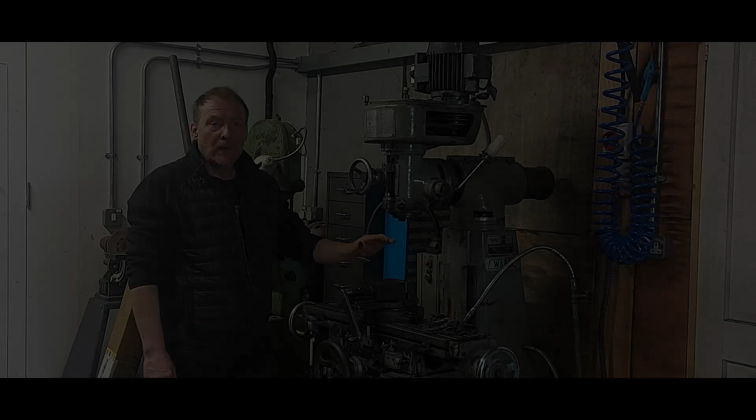Well, we've got the mill back together, so that's good. Got the head back on it. We've made our drawings, and hopefully, if everything goes according to plan, it should fit. So, on with the manufacturing. Right, well here we go with the drawings. You'll have to forgive the crudeness of them, but I'm sure you'll get the idea. So we've got a top plate. That's what we're going to make. It's a top plate and a bottom plate.

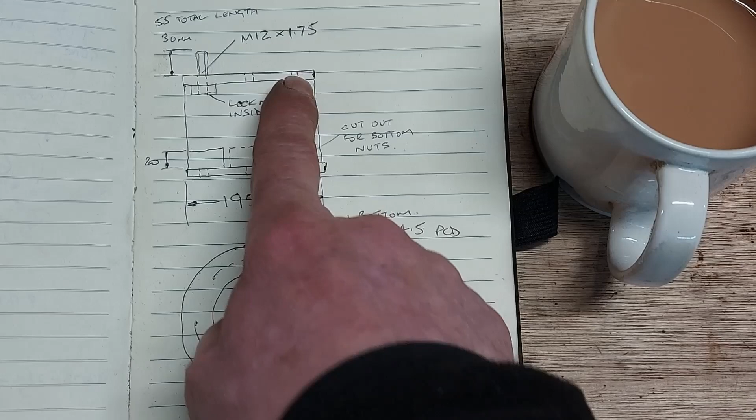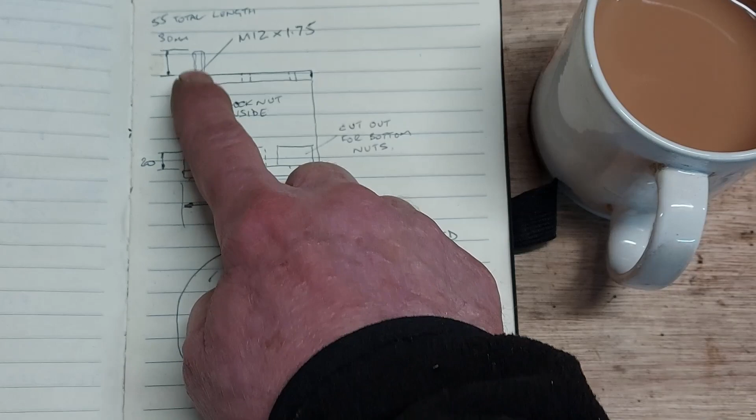The top plate will need to have a 115mm hole bored into it. That allows the current head to sit down into that, which it would do on the body of the machine. The bottom plate will have to have a register on the bottom to sit in the hole that's in the base at the moment, again at 115. And then we shall drill and tap 3 holes, M12 by 1.75, and insert some studs with a lock nut on the back, which we can access through the top hole.

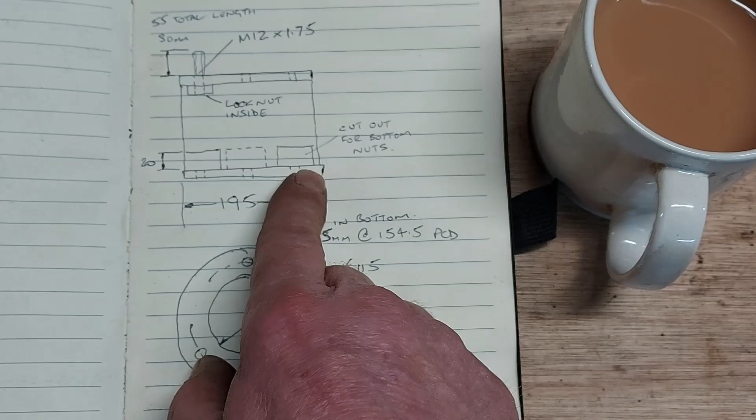That will allow us to bolt the head on, and then we shall recreate the scallop details in the base, which is in the casting already. That allows us then to get to the base bolt, so we can spin the head left and right.

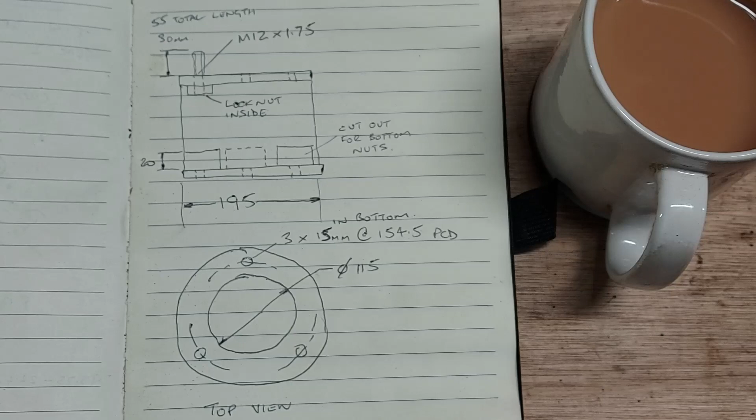I was originally going to go for a 3-inch riser, but looking at it now, I think we're going to have to go for something a little bit bigger, because if I'm going to make something, I don't think 3 inches is going to be big enough, to be fair. So we're going to go for probably twice that, maybe 6, I suppose, with the 20mm plates. That's going to take it to just over 7 inches. I think we'll still be all right for table travel. If not, we've always got the quill to rely on, and we'll see how we go from there.

Not quite sure what I'm going to do first. I think I'll probably make up the plates, top and bottom, which we shall probably set up on the rotary table on the mill, centre the rotary table, then centre the plate, and then we can run a cut around it on the rotary table. That'll probably be quicker than trying to mess about on the lathe. We can also bore the hole.

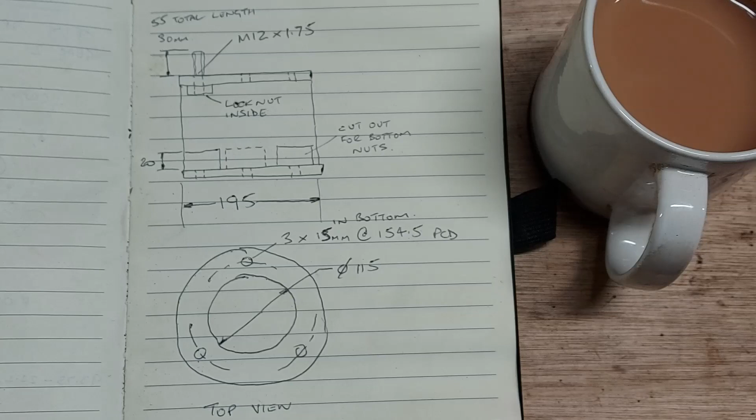Probably not to finish dimension. Concentricity might be a bit of a problem because it's going to be a welded part. So I'm probably going to take everything somewhere near dimension, and then once it's all finished, we can set it up on the lathe and face it, turn it, bore it, and do what we've got to do. Food for thought.

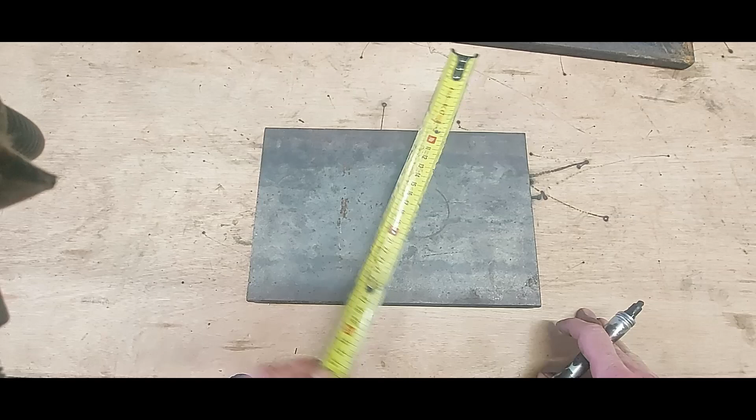Okay, here's one of our plates anyway. It's currently a little bit too big, but it's almost size. We want 195 diameter, so we're almost there. So we'll add a little bit of layout lines. Notice the obligatory tea ring. So let's go around about the 100 mark and in the centre, and that will allow us to add some layout lines so we can see what we're doing.

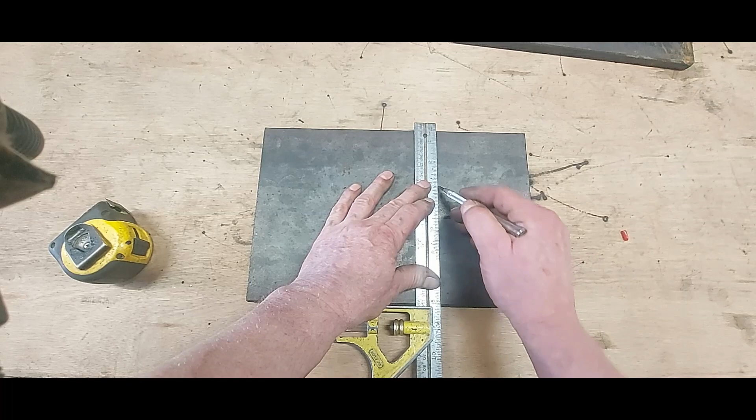So we'll give ourselves a little bit of room. We're coming just over 100. That should be more than enough. And then we want to find the centre, and we are at 200 at the moment. So if we go to the 100, which is there, and now we can dot punch that and get it set up on the rotary table and find the centre. Off to the mill we go.

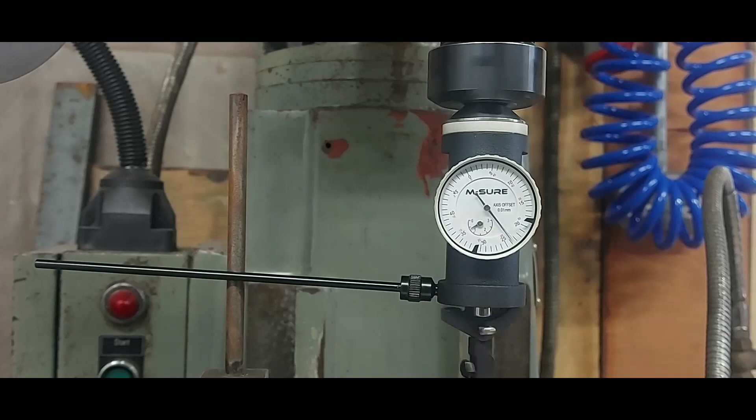Right, so there we are. We've found the centre of the rotary table with the coaxial gauge, which just makes life so much easier. So we're within 0.01 of the centre. That's pretty close for what we want, considering this is going to be a welded part. I think that's definitely close enough.

Right, we've got our plate mounted to the rotary table now. We've got it mounted on some parallels so that we don't obviously hit the rotary table. And we've got some clamps on there. So hopefully we take some very light cuts, take our time with it, and hopefully we'll get there.

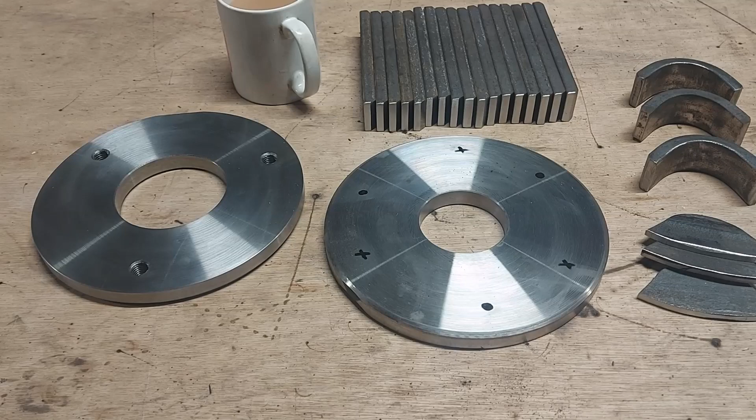Right, well, after quite some machining, as you can see, we've got most of our components ready to go now. We've got the base plate here, obviously the top plate there, and then our various components. These nicely bent pieces will form the scallop around the base nuts, so that will fit on there, get welded on with a little top hat to go on it, and that will sit there. And that will give us hopefully enough room to get the spanner in to be able to slacken and tighten the nuts on the base in order to swivel the head.

And then we're going to use these in vertical fashion all the way round in between to give us the height. And then we'll have to cut some down, hopefully 3, to get in the top of there and weld it all together.

First off, we're going to weld these on because they're not that critical. So I think we're going to weld these on, and then after that we shall tack on probably 3 of the uprights, and then we'll set the whole thing up in the lathe with some form of bung to locate the tailstock into there, hopefully to keep the concentricity, and then we'll work on getting it tacked together and then see where we go from there.

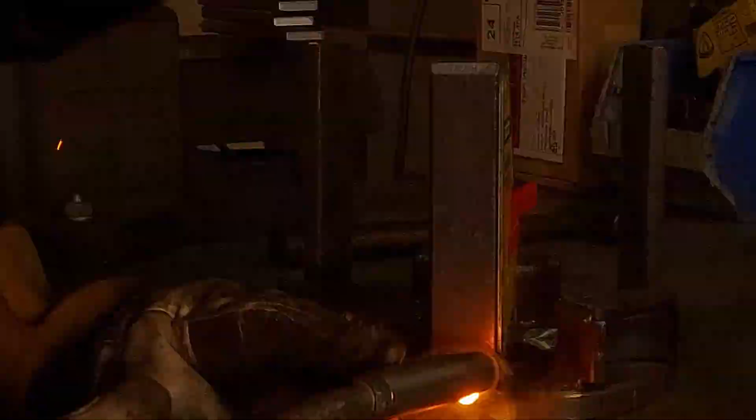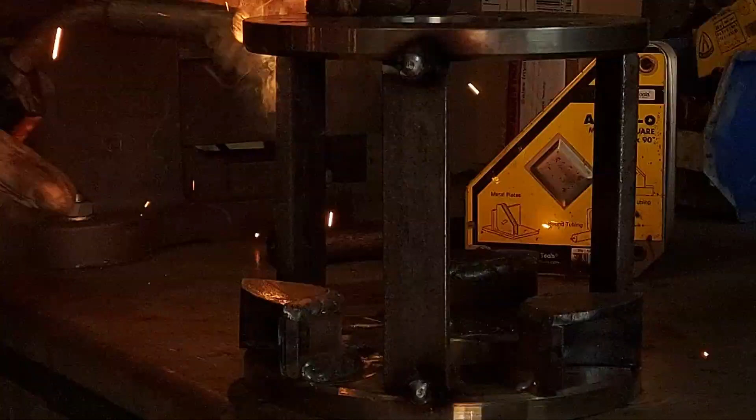Right, here we go then. It's all tacked up. So we filled in all the holes, leaving some nice big gaps to be able to weld up to. I did change my mind, in fairness. I ended up clamping it to the milling table, and then finding the centres. I managed to centre it up that way and hold it while I tacked everything in. Yes, I did protect the mill table, don't worry.

So hopefully concentricity isn't going to be too bad. We won't know till we get it set up on the lathe, but yes, we shall see. If the worst comes to the worst, it can always be bolted back to the mill table and then fly cut or something, just to make sure that the head is nice and level. Obviously we'll tram it in afterwards, but that's a little way off yet, so got a bit of welding to do.

Shame it's not so cold today, isn't it really? There you go. Actually, strike that. I'll have a cup of tea first. Whew. Getting hot in here. Whew.

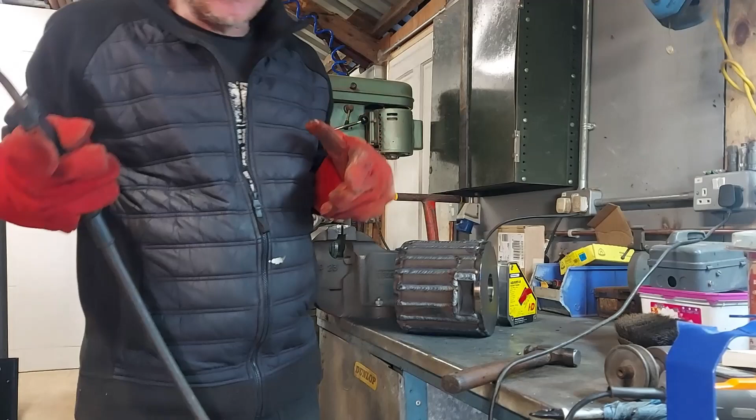Well, as you can see, we've got some really nice fillets going on there. We've really managed to fill up those gaps between the verticals. One thing that concerns me though is the gaps. There's very little gap, even though I've chamfered the edges, so by the time we machine this, it's not going to leave a great deal of weld. So I think I'm going to run a slitting disc all the way around, just to give us a bit more gap on both ends, and then we can fully weld it and start machining.

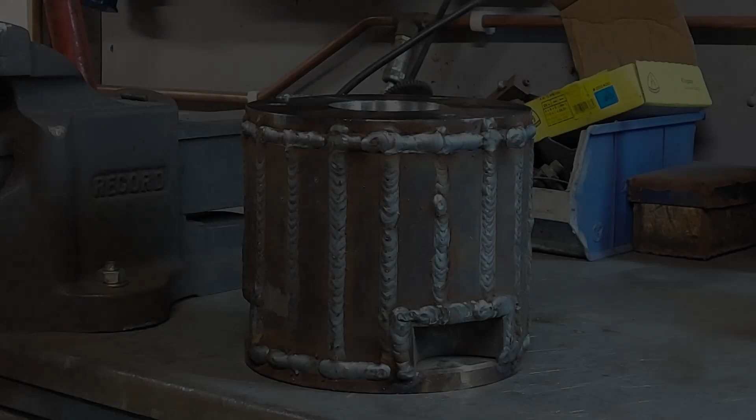Right, so as I mentioned, we've run the grinder with a 3mm slitting disc all the way round on the top and the bottom, and now it's fully welded. There's still quite a nice bit of heat in it, but I think once that cools down, we'll get it set up on the lathe and have a go. See where we go from there.

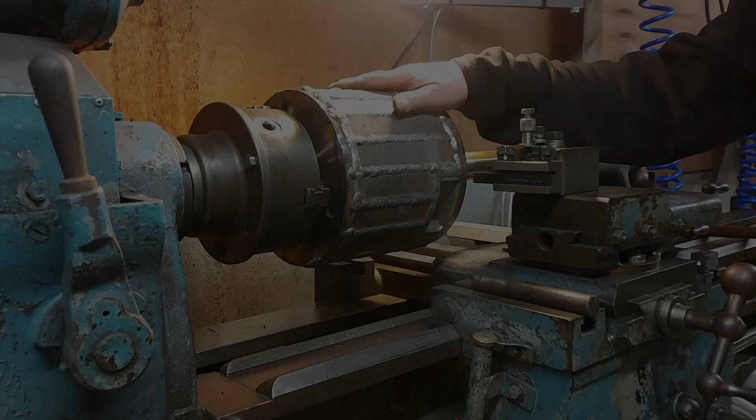Right, well here we are, all set up on the old girl. We've got that pretty close actually, to be fair. It doesn't look like it's going to be that far out, so hopefully there's plenty of material on it to take off. We've already run our scratch pass, which is just starting to catch there, so that's the highest point. So we're going to zero the DRO there, and some very nice light cuts, and make sure it stays in there, because if it comes out it's going to hurt. So let's see how we get on.

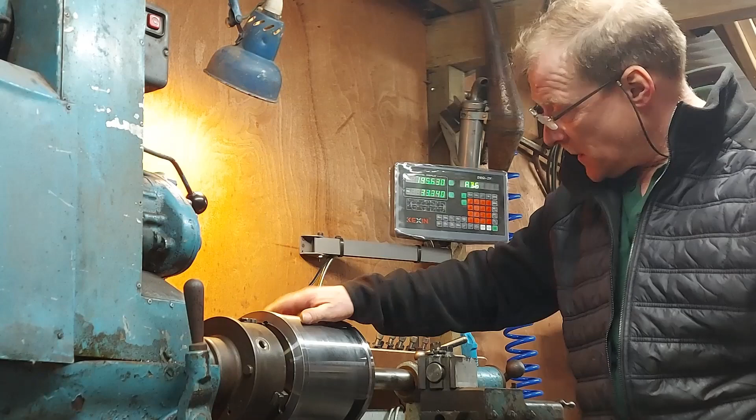Okay, so all the turning is finished. We're nice and cleaned up. Certainly good enough for a coat of paint anyway. Deburred, lovely, ready to go. So we've also faced off what we can reach on the front face while the concentricity is in place. That way, when we spin it, we've got a couple of areas that we can run a dial gauge over to make sure we're running true.

So really the only last job we need to do is to finish off this internal bore on this end to make sure it's nice and true, obviously for when we spin it. We faced off this and done the register. So what we need to do now is mark on a witness mark, excuse the noise, a witness mark for the PCD for the holes in the bottom, which we shall use the DRO for.

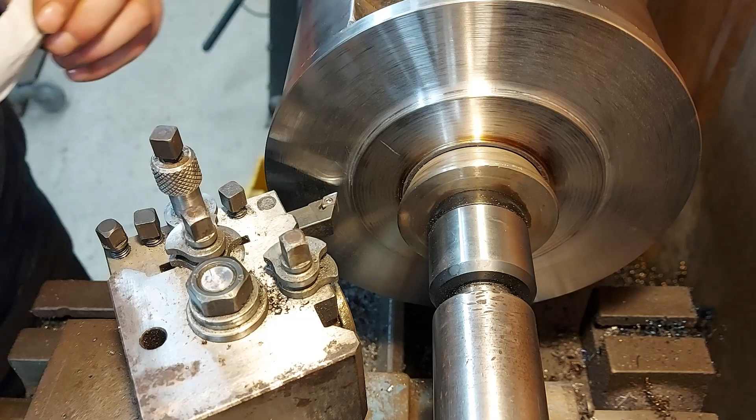Right, so in order for us to find our PCD, we need a known reference point. Luckily we have our register on the back here. So we're going to use the paper touch method of touching off. So we just put a piece of paper in there like that, and then we come in with the cutter until such times as it just grips the paper, and there we go. So we've just grabbed the paper, that's definitely got it.

Lovely. The thickness of the paper for our accuracy is going to make no difference whatsoever, so we can call that 0. But we have actually got a dimension, and I know that because I just measured it. So then we can program the DRO with that dimension and get us exactly where we want, like so. The DRO now knows where the cutter is, but the lovely part with the DRO is we can actually tell it what size. So if we set the Y direction to a size of 114.78 and enter that in, the DRO now knows where the cutter is.

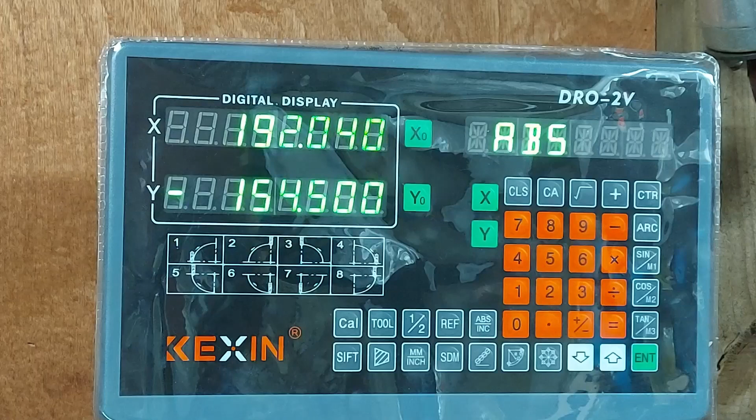So now we can index the cutter out to the PCD that we want, which is 154.5. That will put the cutter exactly where we need it. Very clever. And now we're in the right place. It's a very simple case of just a little witness mark, and we can mark our PCD. Simple. So now we're just going to clean up this little bit of the face that we couldn't get to because of the tailstock support, so that will finish that off quite nicely.

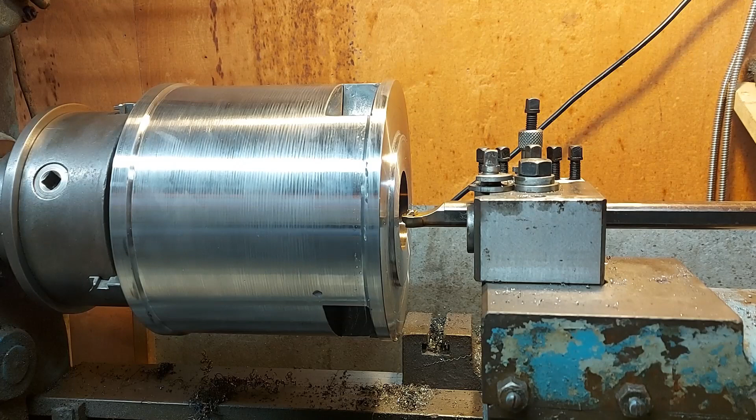Right, and here we are all set up, we're going to true up this bore now in the bottom end, so that when we're ready to spin it round, we know we've still hopefully got our concentricity. Right, so we're all spun round now. We got it set up really nice to within 2/100ths of a millimetre, which I think, considering what it is, is pretty good. We've finished off the facing of the top plate. And now we just need to take out the bore to the finished size, 115. So we'll take a cleaning pass on that, and then we'll measure it. We'll do exactly as we did before with the DRO. We'll tell the DRO where we are, and then we can get pretty damn close.

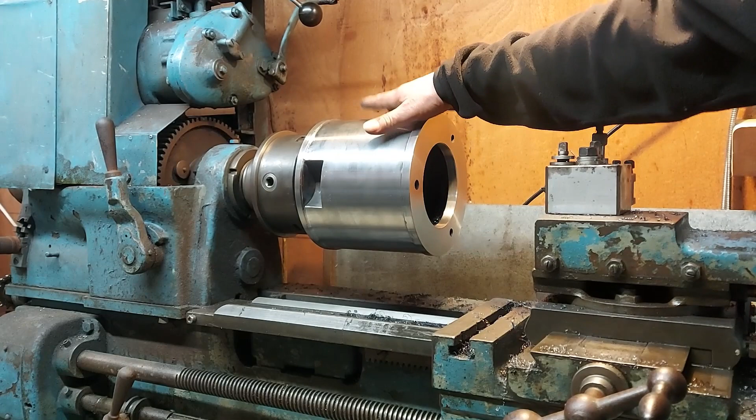Right, there we go. That should be all the machining done. We just need some holes in the bottom, and that's good. Our bore is all done. Currently it's around about half a millimetre too big. But that's obviously going to shrink because there's quite a bit of heat in it from machining. So we'll let that cool down. We'll give it a measure before I take it out the chuck, see what we're at. If we need a bit more, we can always give it a bit more. And obviously you know what that means.

Well, we've got it set up on the drill. I was going to drill it on the milling machine, but surprise surprise, there's not enough room. Typical. Who said confidence was overrated? I haven't even tried it yet. This is the only trouble with making a mess, clearing it up. And made a fine mess I have.

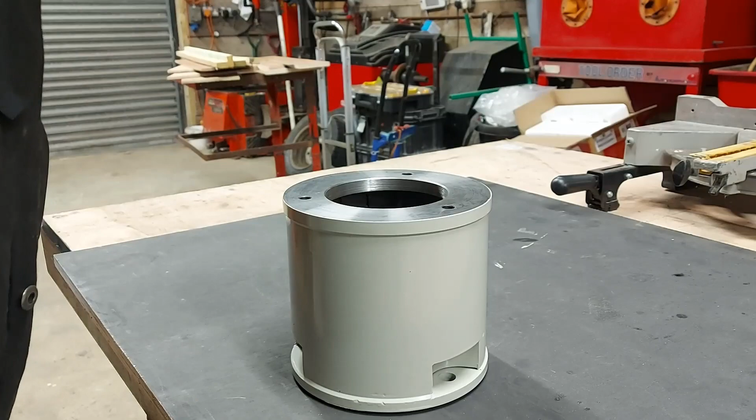Right, well, here it is, all finished off in its coat of dove grey. We just need to install the studs in the top with the lock nuts to lock them in, and get it installed. At last, and there it is, it's all fitted, tightened up. Lovely, look at that. Now we've got just over 10 inches between the vise and the chuck. Take the vise off, I could probably get an engine block on there. So, perfecto. It's been quite a challenge, I must admit, but it's done and I'm happy.